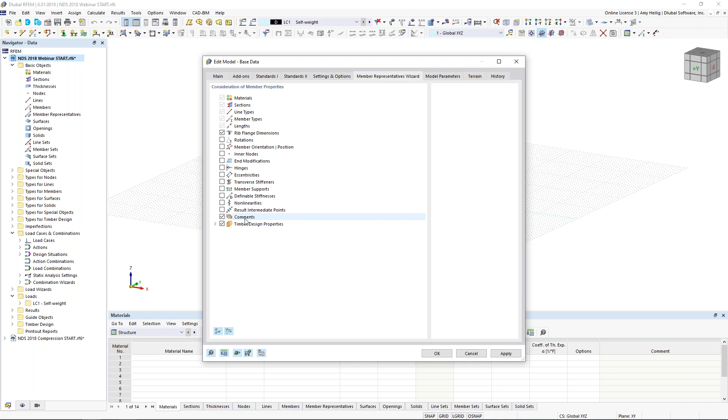Under these settings and options, we will set our global z-axis to upward as well as our local z-axes. I have also enabled these member representatives. So when I activate this option, I get a new tab here. This allows me to group together members that are similar with cross sections, with lengths, with materials. Notice I've also enabled comments—this will come into play later on, so we'll see the advantage of what member representatives can do for us.

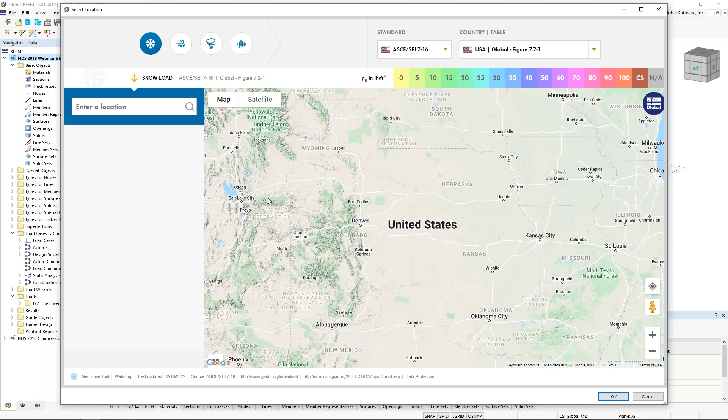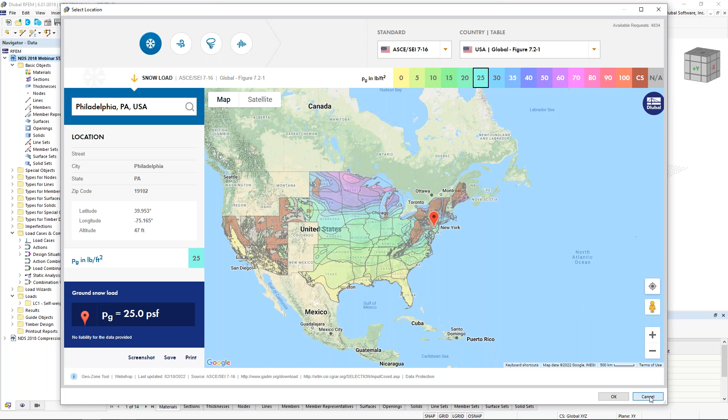Finally, under the model parameters, you can see this links directly to our online GeoZone tool. This GeoZone tool is available on our website where we have integrated the maps from the ASCE 7 for snow, wind, tornado, and seismic. This is linked with Google Maps technology, so we just need to type in our project location, for example Philadelphia, and we can see the ground snow load is automatically populated here directly from the standard. When I click OK, all of this information is automatically imported into the model, to be used for those load wizards a little bit later on.

Once we are done defining the base data, we will be brought into the main program, and we can see our drawing grid activated here. We can modify those drawing grid settings by right-clicking at grid down at the bottom. My default spacing here is set at 1 foot. If we see anything other than this, for example when you first start the model, you might see something like around 3 feet. You can always hit this default option to go back to 1 foot or adjust this to maybe 0.5 feet.

We can also open up our units here and change this to inches if we're working on a much smaller scale.

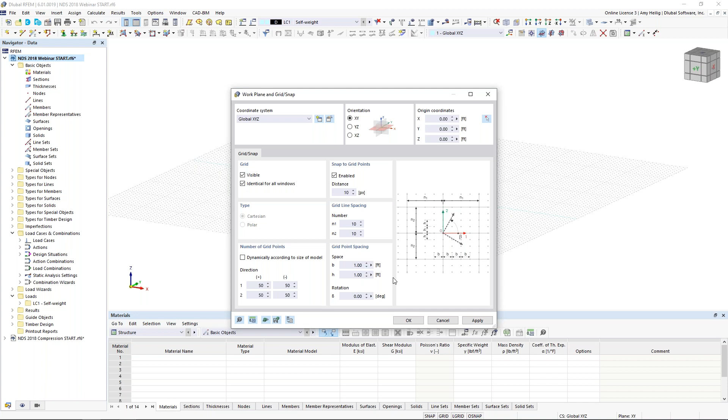There are many different ways to model within the program. We could begin by drawing our first member and defining the cross sections and materials as we go. But an alternative option I'm going to take is to define all of my cross sections and materials at the beginning.

So over in the navigator, I can right click on my sections and create a new section. I want to access my section library, and we have our standardized sections over on the left, which does include timber. When we launch this, we can use our filters to filter to NDS 2018.

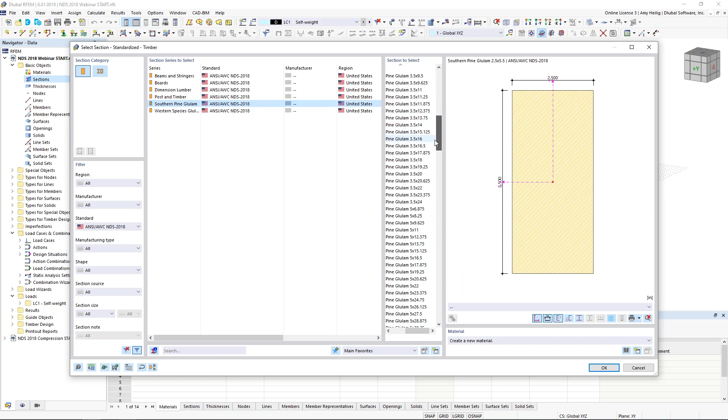We see the various dimensional sections available to us, including glulam, and all of the available sizes. Now the alternative option is to go back into the library and choose one of our parametric massive sections, for example a rectangle. This allows me to input the dimensions directly, and we'll choose 8 inches in width and 15 inches in depth. The cross-section properties will be automatically calculated.

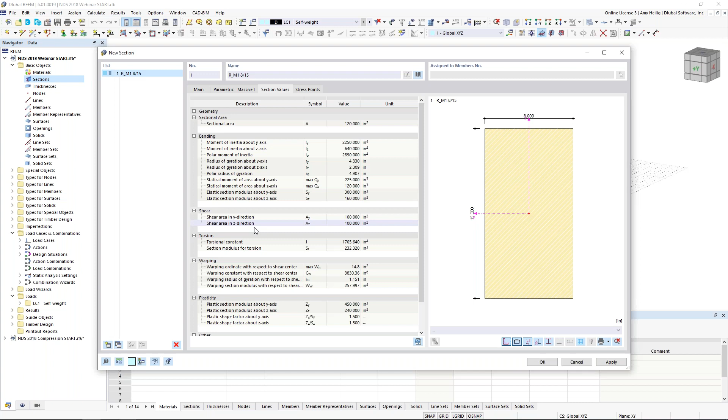Back under that first tab is where we need to set our material for this cross-section. So we'll visit our material database now, and we can use our filters to filter to timber, and filter to NDS 2018, and sure enough we have every single material available here from the NDS standard.

Now we can take it a step further, and perhaps we want to filter to table 5A for our glulam materials. I'm going to select 24F 1.7E. On the right-hand side, we can see the different options, and we'll choose Southern Pine. I click OK, and now that material is available to me for all future sections that I will model in the program.

I can simply make a copy of this existing cross-section, and rather than going into my library, I can just type in the exact dimension here, 26. We'll notice that this cross-section updates accordingly, and the same material will be used.

We want to create one more cross-section here. This time, instead of a rectangle, we'll choose a parametric square section. Under the massive tab, I will go ahead and adjust the dimensions to 6 inches.

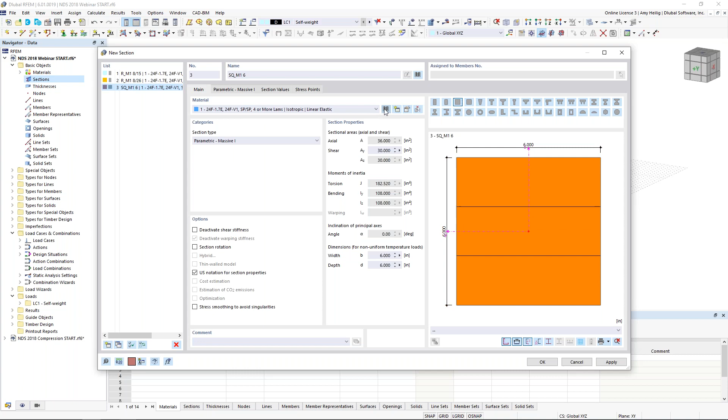Under the main tab, I don't want to set glulam, but rather I'm going to go back into my material library and choose table 4D. Now we can see all of the available materials to us, which is still a little overwhelming, so we can take advantage of the search options down at the bottom.

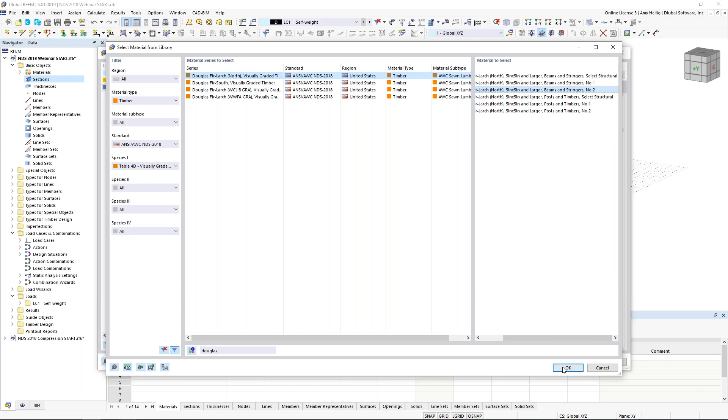If I begin to type Douglas, notice that all of the materials with Douglas within the name are now filtered. So I can choose Douglas Fir-Larch North, and then scroll over to select number 2. I click OK, so now we have that solid section given to us here.

Once I click OK, what I'll notice is that my materials and cross sections are now available within my navigator here. So I want to begin by drawing my first member.

I will adjust my drawing grid into the vertical XZ plane, and go up to my tool to draw a new single member. The member type is going to be beam.

The design properties are activated here, and this is specific to the timber design add-on and relative to these additional tabs up at the top. We'll leave this enabled, but I'm not going to get into the details right now specific for the design properties. We'll go to the section tab here, and the distribution type is going to be set to linear.

This allows me to define a tapered glulam section. Now, new within RFEM 6 is that previously we only allowed you to define a tapered section that looked exactly like this, where the center line just runs right down the center.

But we have added within RFEM 6 the ability to adjust the alignment. So now we can see that the taper only occurs at the bottom section of the member.

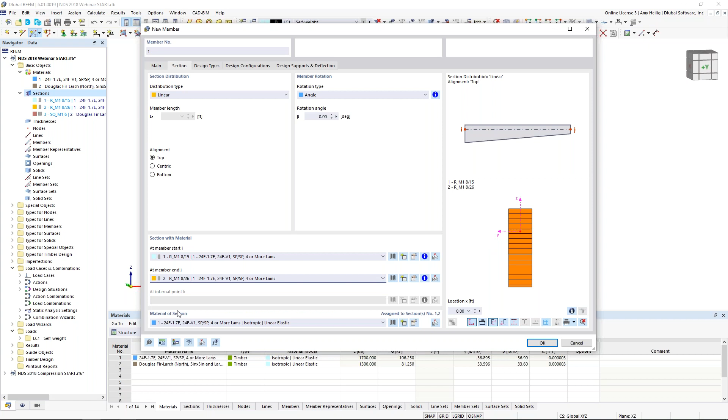So the member start will be that 8 by 15 section, but the member end will be the 8 by 26 that we've already defined. The material is automatically set here. So this is all that we need to do to define our first member. We click OK, and I can snap from the point 0, 0, 0 up to a point 15 feet in the vertical direction, and we have our first tapered member.

Now, in a similar fashion, I can snap to a point here 23 feet in the X direction up to the top of the column. If I right-click to exit out of that dialog box, I see here that I would like to add in some type of pitch for my roof, and I'd like this pitch to be 14 degrees.

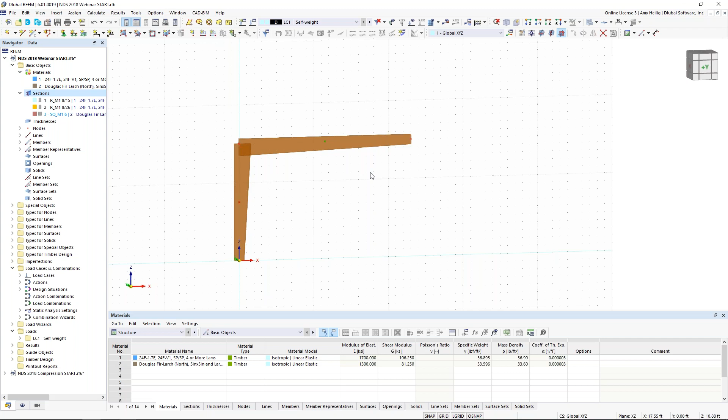So rather than manually having to figure out the geometry, we can select this member, and under the edit options, I can go down to chamfer, and I can input in an angle of -14 degrees. I would like to rotate about the global y-axis in the vertical z direction. And then I need to graphically select my base point here. I click OK, and so now we'll have that 14-degree incline.

I select both of these members, and I'm going to utilize my mirror tool. This is exactly like what we would see in something like AutoCAD, where I can create a copy. I would like to mirror about the ZY plane, and I'm going to choose my mirroring point right here at the apex. I click OK, and we should see our first frame generated.

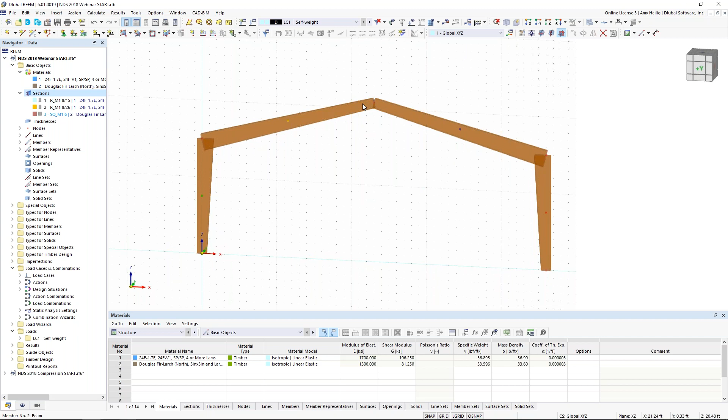Now, I want to add a member hinge at the top here only for my beam on the left. Well, I can do so by double clicking on the member. Now, by default, everything is considered fully fixed. So in order to add in that member hinge, I can activate the hinges here. And now we get a new tab. And at the member start, I can define my member hinge. And you can see that the program automatically suggests I probably want to release the moment about the local Y and local Z axes. That's correct.

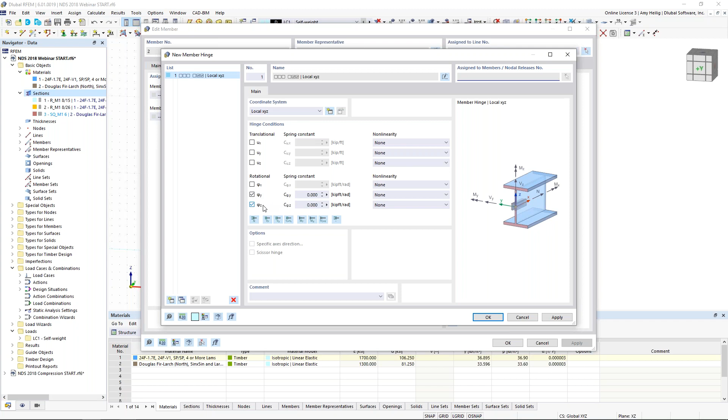I click OK. So now that member hinge definition is available to me for any future members within this model. I don't need to keep redefining. I can simply select it from this drop-down box. I can click OK. And now we should see that member hinge applied to that beam on the left. So I'll turn this into wireframe view, and I'm going to turn off my member representatives in order to make this a little bit more clear for you.

I'm going to hold down my control key to select both of these top members. And I'm going to right click, and under members, I am going to divide the member by a set number of intermediate nodes. So I want to add 2 nodes along the member length here, but it's really important that I also check this option down at the bottom to create the on member nodes without actually dividing the member. We want to keep these as one continuous segment and just rather have these nodes added along the length.

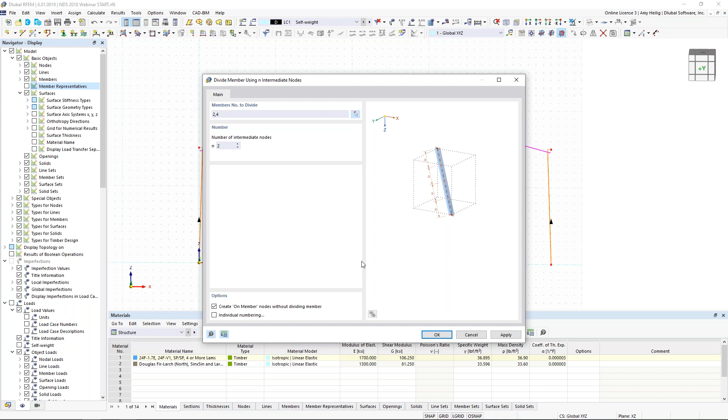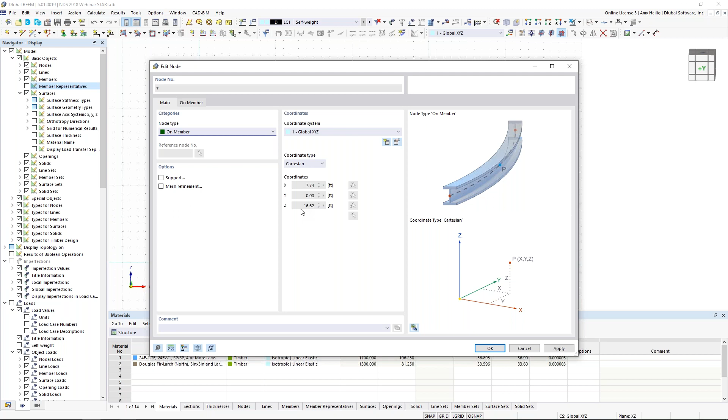So when I click OK, you'll notice that these nodes are added. They're a different color than my standard nodes. If I double click on it, the reason why is because it has this special setting here. The node type is set to on member rather than standard. So now any other member that frames into this original member, or loads we add at these specific nodal points, will all be detected along the member length.

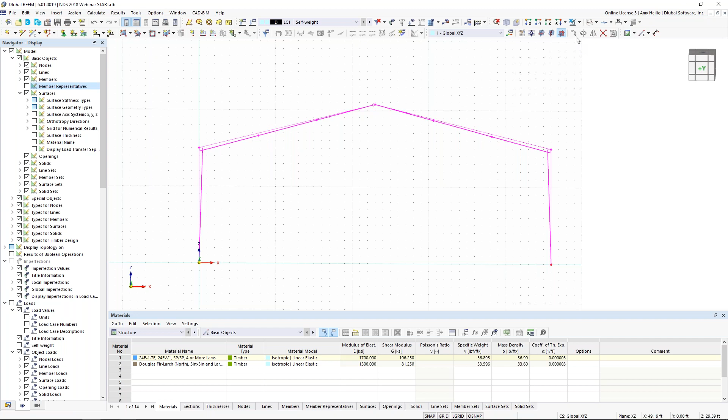I'm going to take my selection box and drag from right to left. And notice I am not going to select the nodes at the bottom of the structure, and there is a reason for this. We will select all of these objects except for those nodes and utilize our Move Copy tool. Move Copy tool allows me to create a copy, and I'll create 4 copies in the Y direction of 16 feet. But under my second tab, I have this option to activate these step links.

So when I activate this, I get a new tab, and the program allows me to create new members between my copied nodes. So I can create a new template, and this should look like a familiar dialog box. It's as though we're drawing a new member. The member type is going to be set to truss.

So truss is a little different, and you'll notice that the hinges is now grayed out. That's because internally we're going to assume that we have a moment release at the member start and the member end. So rather than having to manually define that, we can select truss, and that's automatically applied.

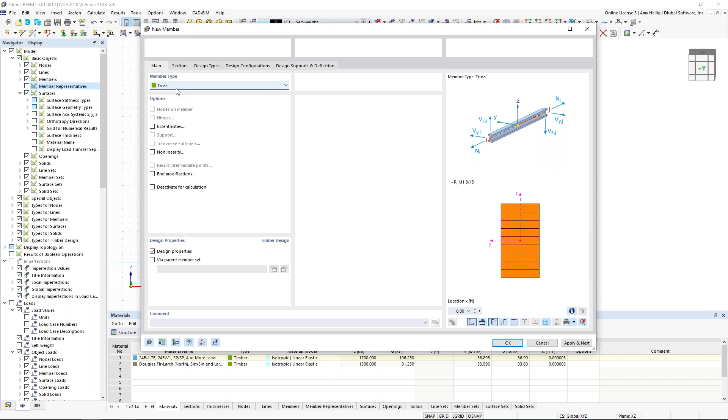Now for my cross section, I want to use my drop-down box here to select that 6x6 solid Douglas fir-larch section. I click OK. Remember, I'm still within the Move Copy dialog box. I click OK. And again, the advantage is that the program has automatically generated those members between those copied nodes.

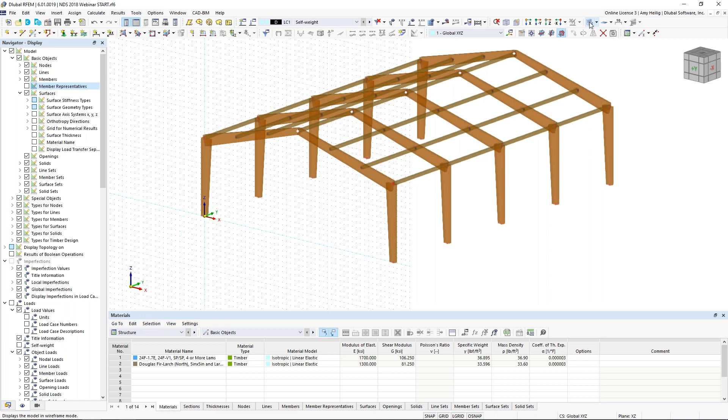Okay, so what we would like to do now is to add some columns at the front and rear of our structure. What I'll do is turn this back to wireframe view, and I'm going to adjust my drawing grid origin with this button up here in my toolbar. And I want to snap that directly to this point along my member length. So we can see when we rotate this around, the drawing grid's still at the front of the structure, but I've just modified the location.

We're going to draw a new member. The member type is beam. I do want to activate the hinges here. At the section tab, I will leave this as the 8x15 section, but not tapered, just one continuous section throughout the length. For the hinges, I would like the member hinge to be applied to the member end. Remember, I've already defined that member hinge. I can select it from my drop-down box.

I click OK, and I'm just going to snap here from a point at the bottom of my structure up to the top, the intersecting node. Now, this node needs to be slightly adjusted at the bottom. Rather than sitting at negative 0.33, I want it to sit at 0 elevation. I just adjust that, I hit enter, and now that column is exactly where it should be. I can highlight this element, hold down my control key, and utilize the drag and drop feature to make a copy here on the right side of the structure.

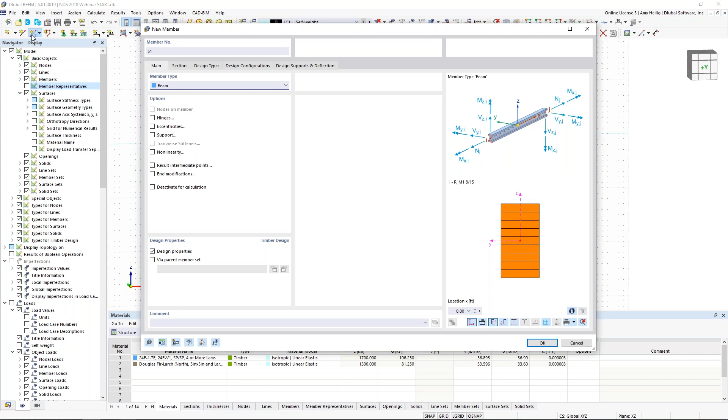I would like to add in some additional lateral bracing here in the global X direction. So we go to draw a new member. Once again, the member type will be set to truss. The section is going to be that 6x6 solid section here. Remember, I don't need to apply any hinges because internally the truss option is taking care of that. And I'm just going to snap from the bottom of my column elements up here to the top. I can rotate this around. Notice the program automatically snaps to these nodal points.

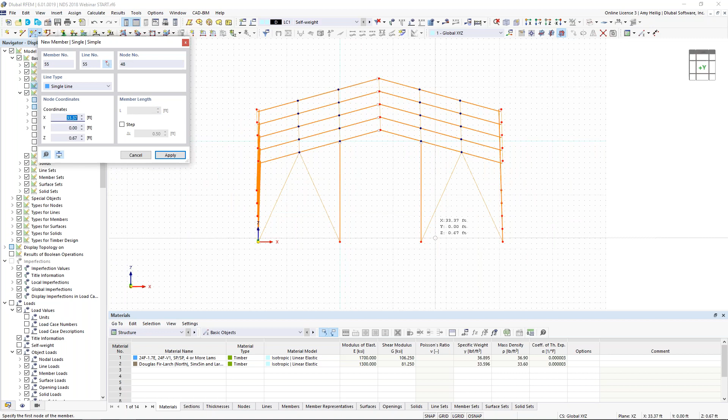While I'm still within this dialog box, I want to add in additional lateral bracing here in the global Y direction. So I will snap from the bottom of the column. Notice the program detects the midpoint here of that truss segment. And I'll do so up here on the roof by just selecting my start and end node points. And we'll do it one more time here. I right click to exit out of this dialog box, zoom in just to make sure everything's connected, everything looks fine. Now I'm going to hold down my control key to select these additional brace elements that I just created.

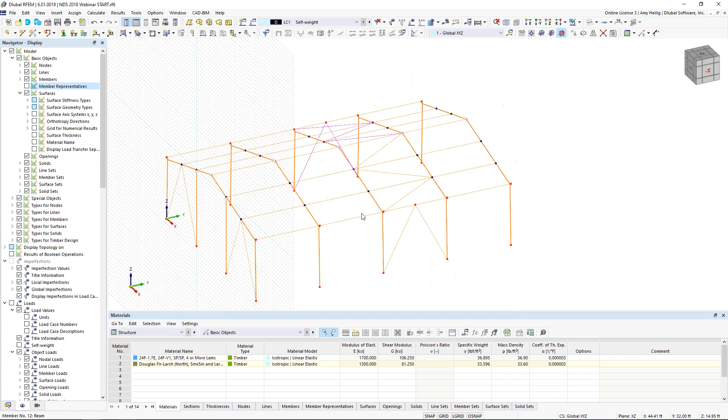We'll utilize our mirror tool once again to create a copy about the YZ plane, and I'm going to select my mirroring point at the top here of my structure. I click OK, and now we have the bracing on the other side. I would like to take these elements at the front of the structure. I will use my selection box to highlight them all. I hold down my control key, I drag and drop to make a copy at the rear of the structure. So now those column elements and braces are shown at the rear of the structure with that simple tool.

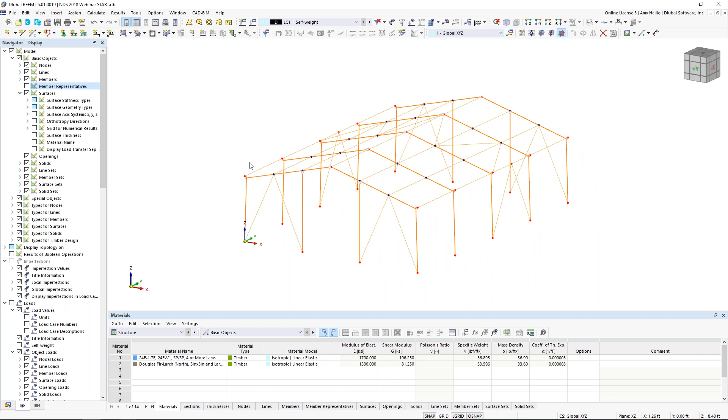Okay, the member modeling is now complete. What I would like to do is to support the structure with a new nodal support, and we can find that up here in our toolbar, assign new nodal support. Now we have some default options here within the dropdown, including a typical hinged, we have fixed, or we have a few roller options. Of course, you can always create your own nodal support option with the 6 degrees of freedom. Non-linearities are available in there as well, but for today, we're just going to choose the default hinged. I click OK, and this will allow me to highlight over all the nodes at the bottom of my structure.

And if I right click to exit out of that dialog box and right click on any one of these nodal supports, I can use my slider option here to increase or decrease the size. So that's also new within RFEM 6. So our member modeling is complete.

We've added the supports. I'd like to move on to loading now, but there's one thing that I want to take care of related to modeling that does affect our loading. So this will be a structure with obviously some type of roof membrane. But I don't want to actually draw in the roof surface with a material and thickness. Rather, I'm going to take advantage of a new feature within the program for load transfer only.

So I'm going to draw a new surface, and the surface is not going to affect the stiffness. It does not add any rigidity to the structure. We're not applying a material. We're purely using it for load transfer to our members. So within our toolbar, we can draw a new surface, and I'll choose the option polygon.

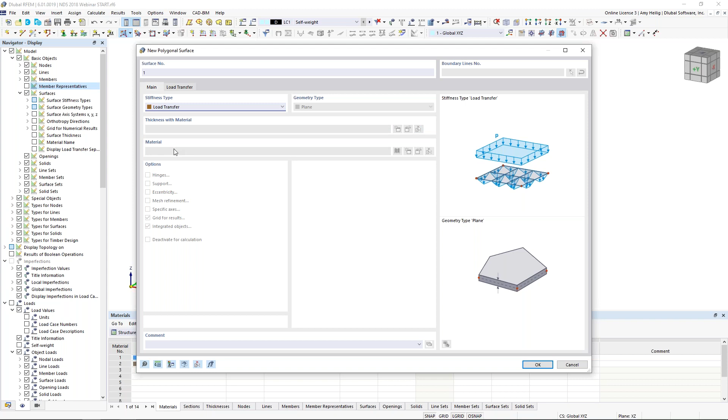So again, rather than the stiffness type set to standard where I would define a material and thickness, we're going to use our dropdown to select this new option, load transfer. Everything is grayed out here. Again, we're not adding stiffness, but rather we go to this second tab here and we tell the program in which direction we want to transfer the load: one-way load distribution in the x-axis, these are local x-axes of the surfaces, local y-axes, or do I want two-way load distribution in both directions? We'll go ahead and stick with only the x direction.

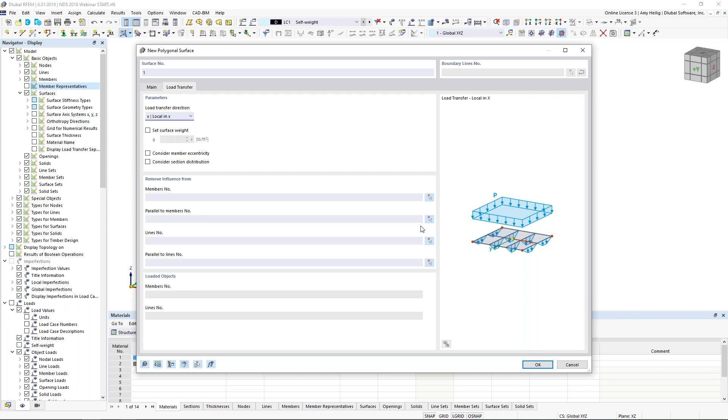And when I click OK, this allows me to snap to my different points here to draw in this load transfer surface on the left side. And we can see that dotted line shown there in wireframe view. We'll do so on the right-hand side, and we'll go ahead and close this loop by selecting our original point, and here are those two surfaces generated.

I can right-click to show the local axis system of those surfaces, and we can just make sure that the local x-axis direction for the load distribution is in the correct orientation. I'll turn back off the local axes. We can even turn this into rendered view here if we'd like to see those surfaces in a bit more detail. So now that these surfaces are drawn, our modeling is complete and we can truly move on to the loading.

So in order to apply the loading to the structure, we need to set up our load cases. I will go up here to my toolbar to select Edit Active Load Case. Now the program by default creates my first load case here, and it is called self-weight. Well, I can go ahead and rename this if I would like to dead load. Notice the self-weight is active here. The action category is based on the ASCE 7. We have selected dead load from this dropdown.

I'm going to create a second load case. This will be called snow load with the action category of snow. Self-weight is unchecked here. We don't want to account for it twice. I'm going to create a third load case, which will be wind 1 with the action category of wind load. And I can even make a copy of this existing wind load case to just simply rename it to wind load 2. Now I'll get back into this dialog box to explain a little bit further about design situations and load combinations, but for now I just wanted to set up these load cases.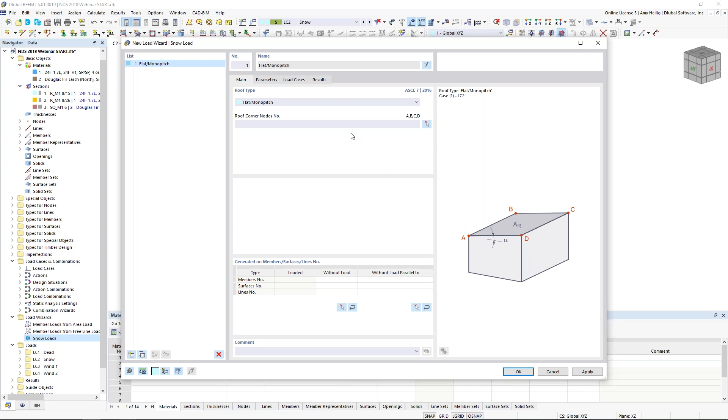So going back to my navigator here, but this time under my data tab, I'm going to scroll down and I'll see my load wizards tree. And we have available the snow loads. So I can double click on this. And what this will allow me to do is to automatically generate the snow loads according to the ASCE 7. So we want to choose the roof type for a duopitch type of structure.

Now, I just want to let you know that this load generator is only applicable for rectangular type structures. If you have anything outside of this geometry, you won't be able to use this automatic load wizard. So just keep that in mind. For today, we do fit into this geometry, so we want to graphically select here the nodes that make up the roof. So we will select the 6 exterior nodes, and I just click one by one. Once I finish that, the program automatically detects what the roof geometry is.

Under the parameters tab, the program has already input my ground snow load. We have connected that to the GeoZone tool directly from our website. It inputs the 25 PSF ground snow load directly from the ASCE 7 maps. Now, of course, you can manually enter in this information as well. Now, the snow load parameters, maybe you'd want to adjust these, such as the terrain category, roof exposure, risk category. We can use our drop-down box for any one of these options.

Under the load cases, we have the ability here to create both the balanced and unbalanced load cases. Now, I'm not going to create the unbalanced for today, so I'll just go ahead and uncheck them, but we will create the simple load case for balance. The program recognizes, okay, we probably want to use load case 2 here that was already set to the snow load designation. So it's populated that.

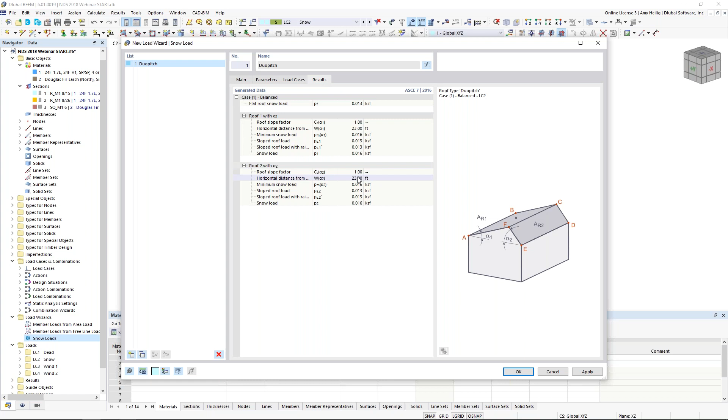Under the results tab, this is just the calculation to essentially come up with the applied area load for our snow load. So once I click OK, what we can see is that snow load applied to the structure here based on the ASCE 7. If I right click to display separately, and then I take my second step here of activating again to display the load transfer separately, we can now see those loads applied to our mainframe elements here for the automated loads.

Okay, moving on to wind loads. Again, this is still in development for our automatic wind load generation according to the ASCE 7, so we'll just be applying those manually for today. Now, I'm assuming that I have an open structure here, so wind is free to move throughout the bottom of the structure. So perhaps for my simple wind load cases, I want to have one wind load with uplift and one wind load with downward pressure.

Well, for load case 3 here, we will begin with a new surface load. The difference here is that I want to change this based on the local X, Y, and Z coordinates of the surface itself. So we'll leave this according to the local Z direction. I want to modify the magnitude to 0.025 kips per square feet. I select graphically surface number 1. I click OK, and then notice I'm going to hit apply and next.

What this allows me to do is to remain within this dialog box, but we can see the upward wind load applied in the background here to surface number 1. Well, now I can just simply adjust the magnitude to 0.015 kips per square feet. I can graphically select surface number 2. I hit apply and next, and now we see that additional surface load applied on the second surface. Well, now I can simply switch to load case number 4, while again, still within this dialog box.

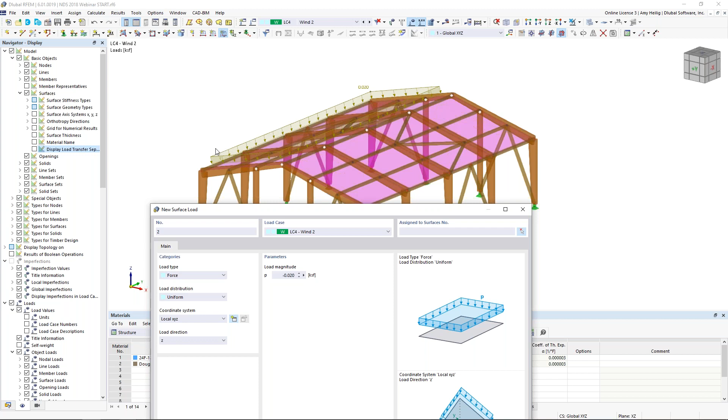I adjust my magnitude to negative 0.02 kips per square feet. I can type in surface number 1. I don't necessarily have to graphically select it. I hit apply and next, and we see that downward pressure applied to surface number 1 under load case 4. I'm going to adjust my magnitude for the last time here to negative 0.01 kips per square feet.

I apply to surface number 2, and I click OK. So now all of our loads have been applied to the structure. So let us go back into the load cases and combinations dialog box here.

Back under the base tab, remember we have activated the load combinations to automatically be generated according to the ASCE 7. The program does require us to choose the wood option because we have activated the timber design add-on. And the entire reason for this is the feature of creep. So let us jump back to the PowerPoint to discuss this in a bit more detail.

So when we automatically generate these load combinations according to the ASCE 7, in particular wood, we are going to create a third design situation. And design situations will make a little bit more sense in just a minute, but I want this to be clear that we are actually going to reference the IBC 2018, and in particular section 1604.3, in order to generate the serviceability load combinations directly from the IBC for our serviceability checks when we go ahead and run the timber design.

And within these load combinations designated within this design situation, one of them will include this creep factor multiplied by our dead load, in order to consider creep. So a new feature here is previously we were not able to consider this creep factor. So you'll notice within the drop-down box, if we do not want to consider creep at all, we can just set this to 1.0. But otherwise, we would choose the 1.5 or 2 factors here. This comes directly from the NDS standard.

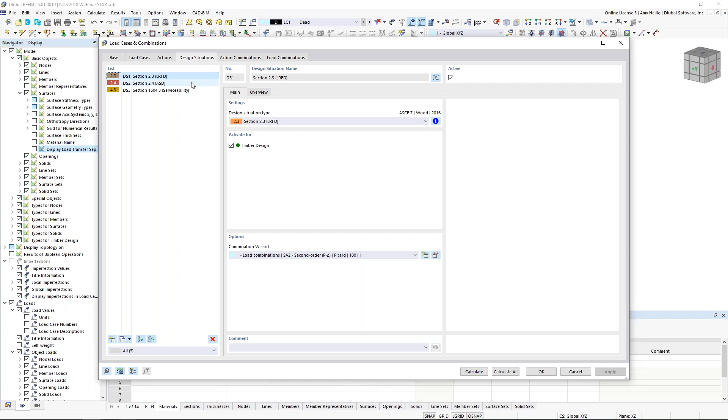I always like to activate this option here, combination names according to the action category. And we will jump to the design situations. So we have 3 design situations generated, 2 directly from the ASCE 7, LRFD, which is our factored load combinations, ASD, which is our unfactored load combinations. And again, this is new within the ASCE 7 wood, is we are going to create this 3rd design situation here for serviceability.

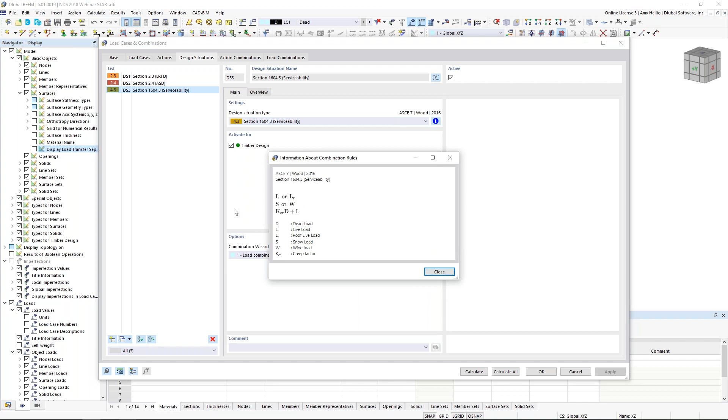If we want to click this info button, we can see directly the load cases that will be considered for the generation of the load combinations. And here is that creep factor times our dead load. All of these are active for our timber design add-on.

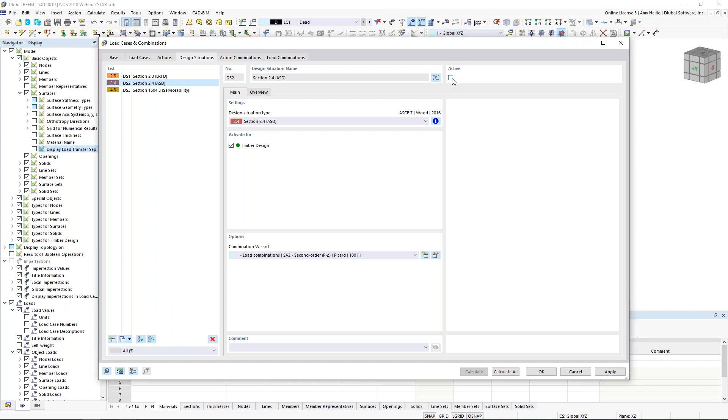Now for today, I am going to be doing my design according to LRFD, not ASD. Therefore, I don't need the ASD load combination, so I can just simply deactivate that here. It will just decrease the number of load combinations, which we can see here under our last tab. Here are my factored LRFD load combinations for my first design situation, and my 3rd design situation are my IBC load combinations. And here we see the 1.5, and we can toggle here to the assignment, the 1.5 creep factor multiplied by our dead load.

Okay, so now that these load combinations are set up, what we can do within our drop-down box is see all of the available load combinations we were just looking at. We can view all of the loads applied to the structure, including the relevant load factors according to the ASCE 7 and the IBC. So technically, we are ready to run the analysis portion. But again, the huge advantage of running RFEM 6 is that these add-ons have all been integrated here within the main program. So we want to do the analysis and design workflow together.

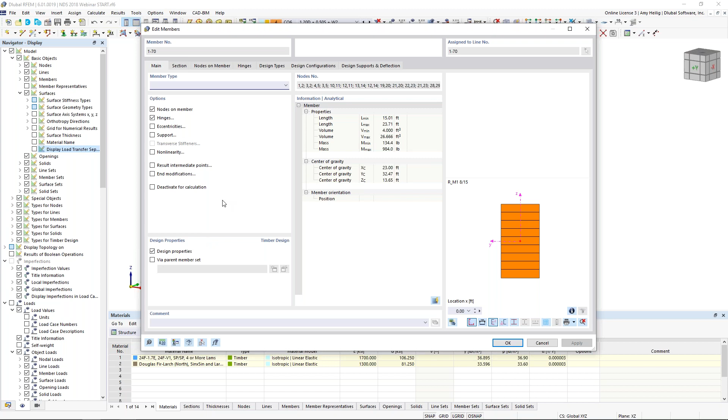So what I'm going to do is to move into the design properties for all of these members. And if I highlight all of my members and I take a look at the edit member detail settings here within my dialog box, you can see I have members 1 through 70 selected. And we have our design properties turned on here, which activates these various settings for design types, design configurations, and so on. Now, rather than individually setting this information, I want to take advantage now of our member representatives. So I will go back into my navigator display settings. I'll turn off my surfaces here.

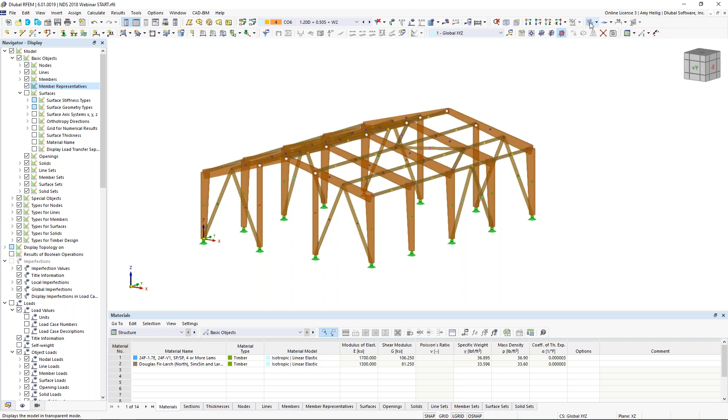Let me turn on the member representatives and wireframe view. You'll notice we have a lot of color coding going on here. We've activated that within the base data, so the program has grouped together similar members with cross sections, materials, and so on. Now I want to take these 4 members at the end, holding down my control key to select them.

I'm going to double click to edit, and add a comment down here, such as end frame. Remember, I also activated the option at the beginning of the presentation so that member representatives will detect different comments. So now these 4 members are in a different member representative group than the interior members. Back under my navigator display, I can also see the color coding, and we can scroll through the different member design or member representative options here.

So what is the advantage of these? When I double click any one of these colored dots, for example member representative number 4, it will bring me into the member representative dialog box, and you'll notice we have these exact same tabs that we saw for each individual member. So what I can do now is input the design information for a group of members that I know are all going to have the same unbraced lengths, the same service conditions, whatever it may be. That way I can go into the member representatives, make a change, and it will affect all of those group members rather than individually applying to each member.

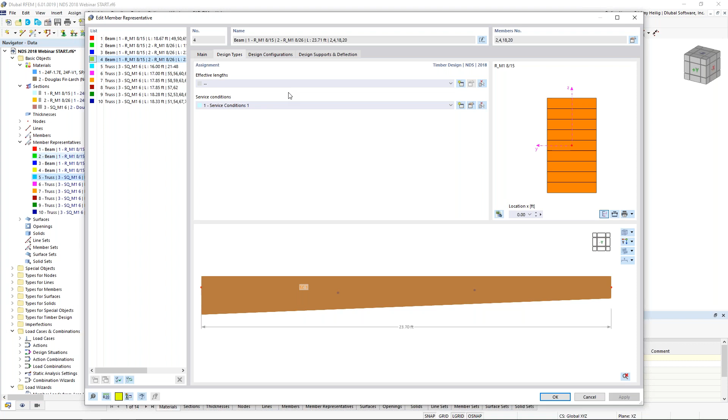So let us begin here with this initial tapered members. Remember, this includes the 4 exterior girders here. Now we want to start off with the effective length, so I'll create a new effective length here. This is my input information for stability design, so we're talking about flexural buckling about the strong axis, the weak axis, and lateral torsional buckling.

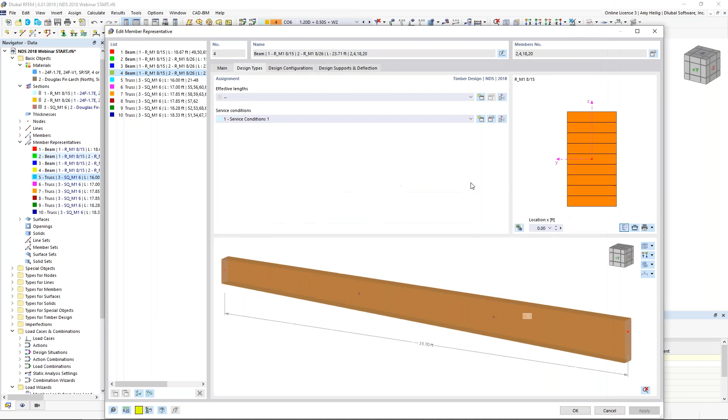Now we want to set the information here on the second tab, but before I do, when I initially create a new effective length, notice over on the right-hand side, my members aren't populated. Well, if I initially create this definition, click OK, and go back into edit the same effective lengths, notice now the program says we're going to assign this to members 2, 4, 18, and 20. Why do I want to do that? Because now my picture in the lower right-hand corner will populate, so I can see exactly which members I'm looking at in order to apply my intermediate restraints.

So let me turn this to wireframe view. Now this all has to do with K-factors, with unbraced lengths, incredibly important for design. And we have two options here. Number one, we could work with the table down here at the bottom. Perhaps we want to toggle this to absolute values, and I could just directly input K times L for my strong axis buckling, weak axis buckling, lateral torsional buckling.

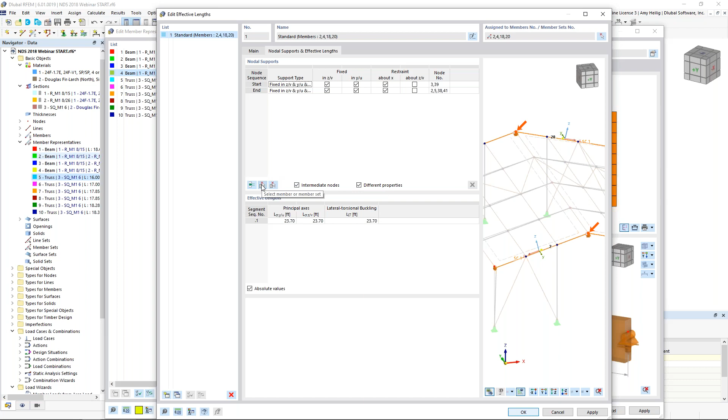Now, alternatively, I can take advantage of inputting these intermediate supports graphically so that the program can calculate the K times L or the effective lengths automatically for me. What I want to do is have the program detect the intermediate nodes along the member length. So I'm going to activate this option here, intermediate nodes, and then use this option to select the member. I can select any one of these 4 members here, I'll just choose any one of them. And now notice the program has detected these 4 nodes along the member length.

So we'll begin right here at the apex. Notice we only have a truss member framing in the weak axis direction, so I probably want to add this intermediate restraint here to only restrain my tapered element in the weak axis or local Y direction. For node number 2, we have a column framing up, so I'm going to assume that this element is restrained in the vertical Z direction, as well as in the weak axis direction from my truss, as well as rotation against torsion at this location.

For my third node here, I'm going to assume these braces really have not much impact, so I'm only going to restrain the member in the weak axis direction. And finally, for my fourth node, we're going to leave this as default in the local Z, local Y, and about the local X axes. So now these 3 segments are updated here to consider my true unbraced length.

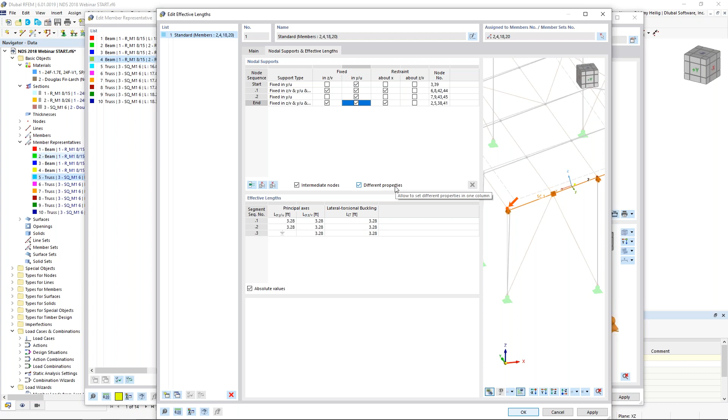So this is how we can automatically consider that within the program by setting these intermediate restraints. When I click OK, we can see here in wireframe view these intermediate restraints applied internally within the member. They're not true supports like nodal supports that we initially applied at the bottoms of our columns. They're just purely used for the design.

Now we want to jump to our member representatives here, which include my 6 interior frame elements. We have a little bit of a different scenario here, so I'm going to create a new effective length. Once again, I'm going to define this effective length, click OK, and go right back in there to edit it.

The reason why is because now under the second tab, I can toggle to my picture and I see my 6 members updated here within my graphical view. I want to detect those intermediate nodes, so I'll graphically select any one of those 6 elements. I see my 4 nodes detected here.

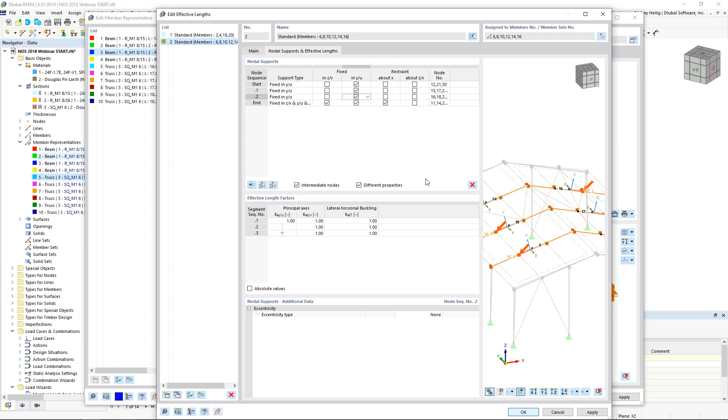Up at the apex, I want to restrain it in the weak axis direction only. At my second node, it is also the weak axis direction only. My third node, weak axis direction only. We have no columns framing up at the center beams here. But finally, at my fourth node, we do have a column. I'm going to assume that the program is going to restrain this in the vertical Z direction, the local Y direction, and about torsion. So we can toggle to our absolute values to see everything updated accordingly.

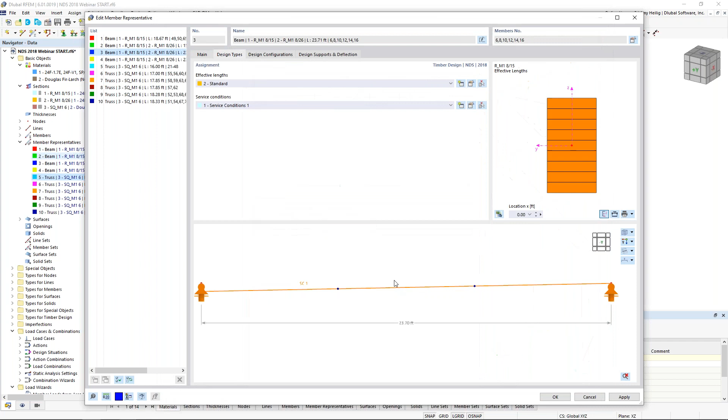Okay, so now that we have defined these for those 6 interior members, we can see the program update here automatically to show what's going to be used for design.

So let us talk about the remainder of all of these member representatives. I'm holding down my control key to select all of them. It is all the remaining braces, the columns, and for this we need to define a third effective length, and this one is much easier. All that we need to do here is leave this as default. These members are supported at the member start and the member end according to these default options here. No intermediate nodes detected. I click OK. We can see the program update graphically here within our view.

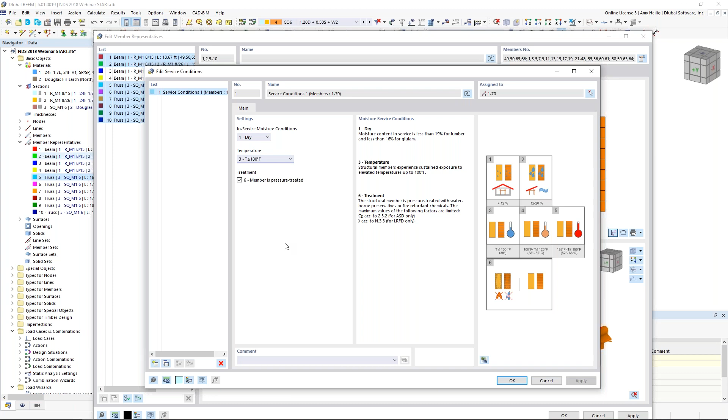Now for the rest of these settings, the service conditions - if we go into the detail settings for these, are the members wet? Are they dry? What is the temperature? Is it pressure treated? We know that this is all going to affect the adjustment factors for the NDS design.

The local section reductions - we can create notches in our members. So perhaps we have a notch at the member start or the member end, or internally, we can define that here with these section reductions. Now this is only available for standard members. You wouldn't see this option for our tapered members if we went back to one of these other member representatives.

The design configuration - so we have here strength, design, serviceability, and fire. Let us begin with the strength configuration. We'll go into the settings here. So just some various settings that will go into the strength design according specifically to the NDS.

So for example, torsion - if we're not really wanting to design these members for torsion, the NDS is a little bit vague on torsion design, and I really just want to skip this. Well, what I can do is set a higher ratio here, such as 0.3. So as long as my stresses for torsion are below a 0.3 ratio of the limiting torsion capacity, then we'll completely skip this check. So that's a little trick you can do here within these settings.

Now we have some additional settings, including topics like the size factors, the flat use factors, and so on. Under the Stability tab, this is a new feature within RFEM 6 specific to the NDS. It is the representative dimension for tapered compression members. I'll go back to the PowerPoint to explain this in more detail.

This all depends on the support conditions, but this is how we calculate that representative dimension. We'll use variables like the maximum depth for the tapered section and the minimum depth for the tapered section in order to calculate this. Again, this all depends on your support conditions.

You'll want to refer to the NDS to review these equations in more detail. The equation preference can be set under the timber strength configuration, under the stability tab, which is exactly what we're looking at here. So I'll go back to the model and we can choose either equation. I'll stick with equation 3.7-3. Once we run our results, I'll show you what this looks like and how we can consider this according to the NDS provisions.

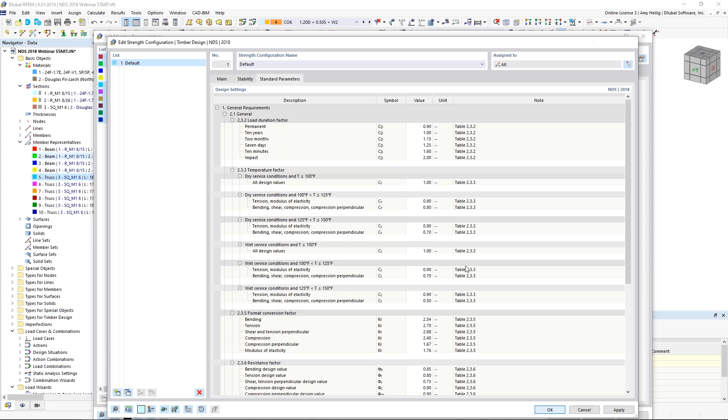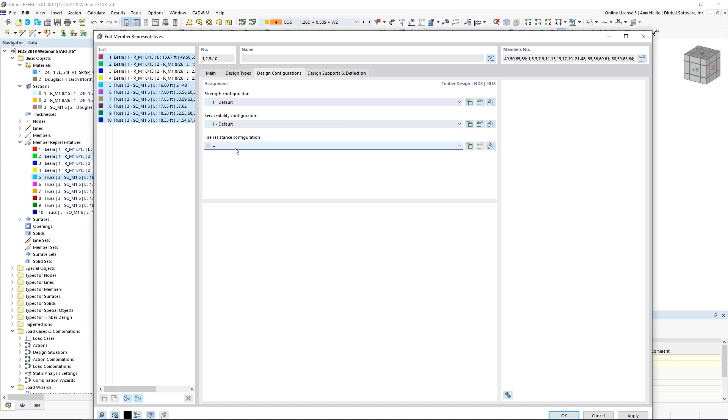Once we've reviewed the strength configurations, we want to take a look at our serviceability configurations, which is quite a bit simpler. We have our limiting deflection ratios for simply supported L/360 and cantilevers at L/180, and you can adjust those as you see fit. Fire resistance design, we won't be doing that today, but that is a possibility to also calculate according to the NDS standard. I'll just go ahead and clear out this setting for now, that's fine.

For the design supports and deflection, by default the program automatically considers every member as simply supported, so it refers back to that L/360 design ratio. If you have a cantilever, you will need to define a design support at the member start or member end. I'll breeze through this tab because our second quick example at the end of the presentation will go into much more detail here, so for now we'll keep everything as default.

Once all of these settings have been defined, we're ready to run our analysis and the design of the structure. So we'll utilize our table options down here to drop down to timber design. This is active because, remember, at the very beginning of the presentation I enabled that timber design add-on.

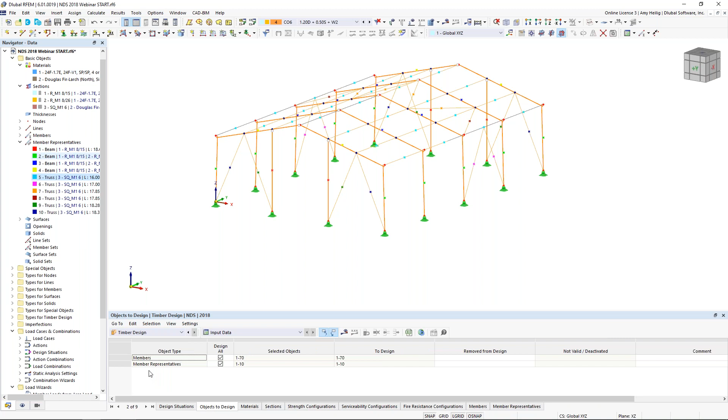If I take a look at my table settings here, in this first tab, design situations, I have my 3 design situations that were generated automatically by the program: LRFD, ASD, and serviceability from the IBC, which we've already reviewed. I'm not doing ASD design today, so I'll simply uncheck that. Notice my factored load combinations, or my LRFD design situations, should be associated here with my strength limit state design, so I'll make sure that's selected appropriately from the drop-down box.

I'm not doing ASD design, so we'll skip over that. Finally, my third design situation for serviceability should be set according to the serviceability limit state design. Now the program knows which load combinations to refer to for the actual design portion of the calculation.

If we wanted to run fire design, we could go back into load cases and combinations, make a copy of our LRFD design situation, and select fire design from the drop-down box. Under the objects to design, we see members 1 through 70 are automatically selected, all of our member representatives already selected here. Everything was defined for our design input for each of those members, so we should be able to design all of them as well.

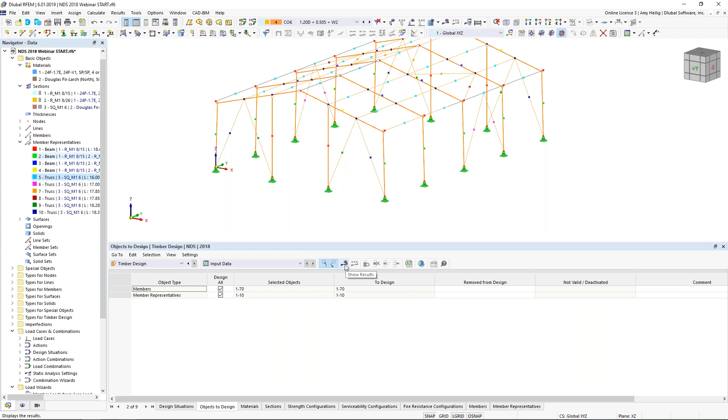I'm now ready to run my calculation, which I can do directly within this table. So I begin the calculation, and the program must run through all of my various load combinations in order to determine the internal forces and the stresses. You can see these solve pretty quickly now in RFEM 6, and we're now running the timber design add-on according to the NDS standard, and here we are presented with our results.

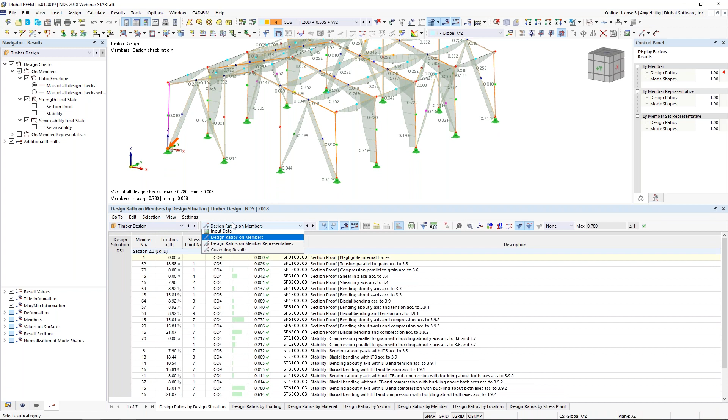I'm still looking within the table format for my timber design here, but now I have available the design ratios such as for the member representatives. Down at the bottom, I can select the design ratios by member representatives here.

And as you can see, the program is synced up with the graphical view so that we're showing you every check within the NDS. For this group of member representatives, the program will point you to exactly where the controlling internal force or stress is located.

If we're interested in filtering to only the max design ratio, we can take advantage of the filter options up here at the top. So perhaps we want to choose the option max, and now maybe we're not so overwhelmed, so that we can just see what's exactly controlling for each member representative.

So going back to the details here within our design, I want to take a look at one of these checks. So we can see the member that we're currently looking at, one of these columns, and stability for compression parallel to the grain. Well, we've added within RFEM 6 the ability to check out the design check details.

And I think this is incredibly powerful because now we are showing you all variables. We are going to show you all of the equations here, and also the code references directly to the NDS standard. All of this comes into play to determine eventually what is our design ratio here at the bottom. So incredibly transparent, we can understand where all of those numbers are coming from. We can add this information to our printout report.

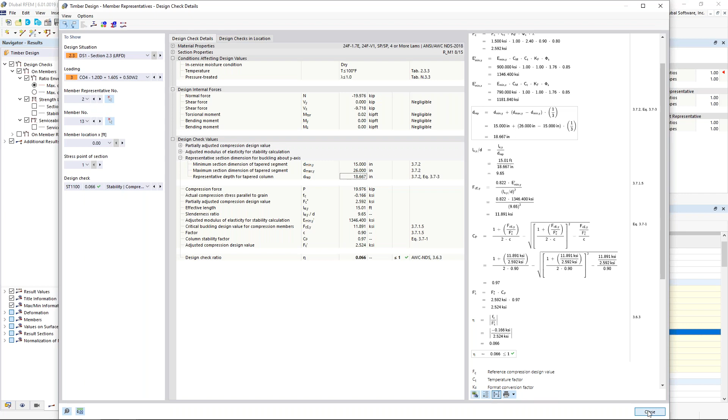Okay, so now that we have reviewed all of the timber design, of course, there's much more to look at, but for the sake of time, we'll just give you a brief overview for today. Now, I want to back this up a step. So let's take a look at only one of our frame elements here, and maybe we choose the visibility by the selected object. So we don't necessarily have to view the entire structure at once.

I'm still looking at my timber design. And to briefly mention as well, everything's available to me graphically. If we go back into our navigator, we can see within our dropdown, we are viewing the timber design results. So perhaps we want to turn off the max design ratio and only turn on the serviceability for this particular frame. Or maybe we want to turn that off and we want to take a look at the stability checks. So we can toggle those on and off. We can add them to our printout report as well.

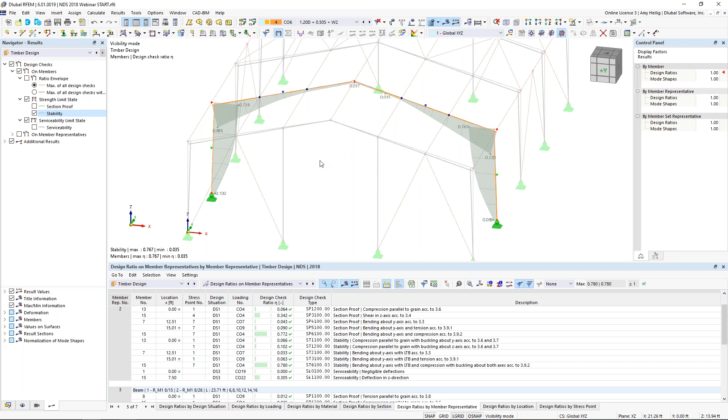But in addition to the timber design, we also have this drop-down box for the static analysis. So the static analysis was required to determine those internal forces, the stresses, deflections, and so on. Notice my table automatically syncs up here to drop me to the static analysis, and my results can be viewed in table format. So for example, I'm currently looking at the deformation, but maybe I'm interested in the internal forces of the members. So I can see my axial forces here, my shear forces, maybe my bending moments.

And for any one of these members, I can right click, and under the members option, I can take a look at my results diagram. The results diagram allows me to turn on and off these various internal forces, deformations. I can view in a bit more detail what's going on along the member length. I can toggle to different load combinations here. I can add this to my printout report. I also can drag this over to my second monitor and continue working concurrently within the program.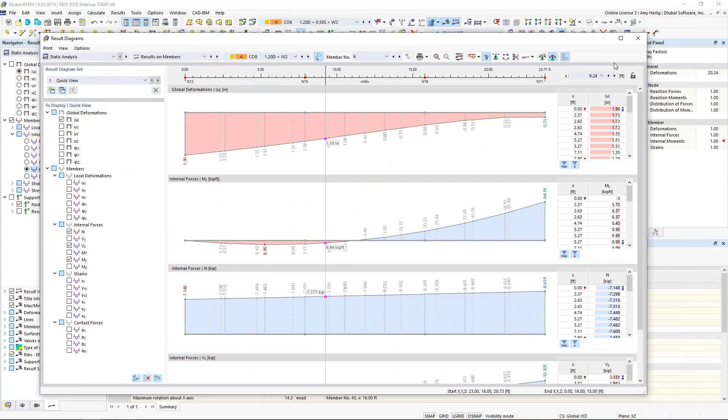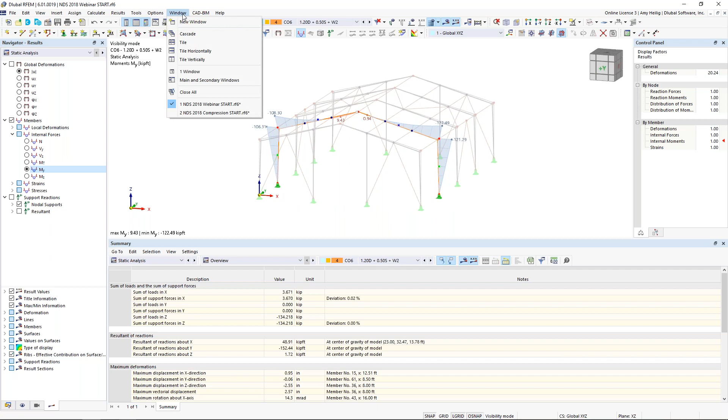So I think it's important to know, again, that both the static analysis and design workflow is working together within RFEM 6, and both of those results are available to us. Okay, so that will summarize essentially timber member design for the most part of this entire structure, but I did want to talk about one more new feature, and I think that this is best described with a new model, just so we can simplify a little bit here.

So I'll open up this already saved model, and we can see that we have multiple members drawn here. And we have our main girder element spanning in the global y-axis direction. Then I have these additional joist members, and these joists are actually going to be supported by the girder member. So they're technically going to be placed at the top of this member.

When we turn this into wireframe view, we know that with any FEA program, these members are just represented by a single center line. Of course, we can render it just to get a better feel of what dimensions are being used, how these members frame in together. But underneath the hood, this is what's going on.

So if my joists are sitting on top of this girder, sure, I could add in an eccentricity to move these joists up to the top, but sometimes this causes unwanted moments at our member end. So for today's example, we're just going to leave this exactly as it's shown, but just visually know that we want these joists to be framing in at the top of this girder supported by it.

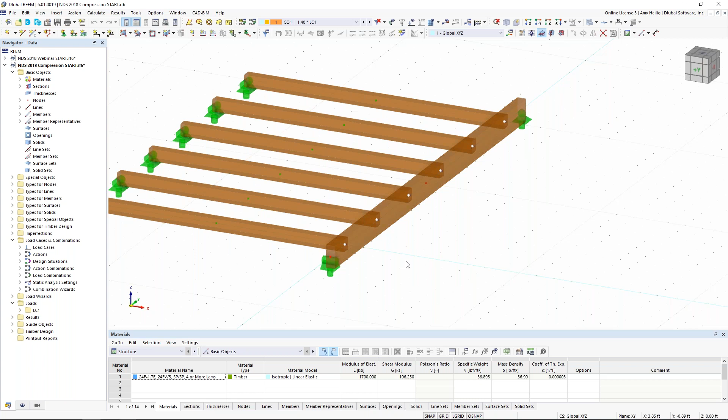So what is the entire purpose of this example? Well, now we want to turn to a topic that again is new within RFEM 6, and it is compression design with stresses perpendicular to the grain. So I'm going to highlight all of my joist elements here, and I can double click. Now, again, we could take advantage of our member representatives in order to set these detail settings. Or for my simple example today, I'll just set each one of them individually, so members 1 through 6.

Now we're going to go back to the design support and deflection tab that I mentioned in the last example I was just quickly going over. So what is the importance of this tab other than just simple deflection? I'll go back to the PowerPoint here so we can talk about compression perpendicular to the grain. And we'll be referring to the NDS 2018 section 3.10.2, bearing perpendicular to the grain.

Now, similarly, in our example today, not only do we have this situation, but we also have the joist sitting on top of the girder with a force acting downward, but it's still a stress perpendicular to the grain. Well, previously in RFEM 5, we did not do this check. And the reason is simple, is that the bearing area was not known.

If you remember back to the wireframe view, all that we know are these simple line elements framing in together within the FEA analysis. But now within RFEM 6, we have the ability to do this check because we have the new feature under the design supports. So you want to refer to the NDS section 4.2.6 because it is important here that we consider the reference design compression values perpendicular to the grain depending on the member's material.

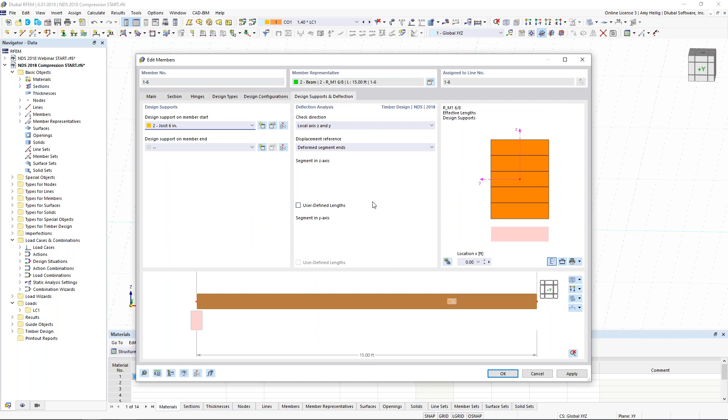I will go ahead and make a copy of this one, and we're going to rename this one to joist 6 inches, and we're going to set the support length to 6 inches. So when I click OK, this allows me to define at my member start that 3-inch support, and we can see this in the background. It will be applicable to these supports over on the left. And then for my support on the right-hand side where it's resting on this girder, we want to select the joist 6 inches. And we can see those supports shown here graphically.

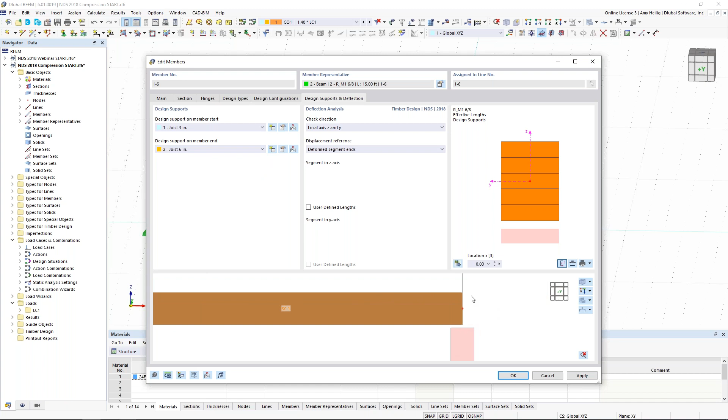Now notice everything is framing in at the center line. If we wanted to, under the main tab, we could activate here the end modifications and we get an additional tab available to us. So what is the advantage here of the end modifications? Well, if we wanted to graphically extend the member to the edge of the support, we could do so with a quick click of a button here. Now, this does not affect the analysis, the stiffness, the design whatsoever. It's purely for graphical representation.

So maybe it's important that you add this to your printout report and you want to show that the member goes all the way to the end of the design support. But just know that internally, we're treating everything with the center lines. Okay, so now that we have defined the supports for our joists, we can click OK, and we should graphically see them now at the bottom of our joists here back within the main program.

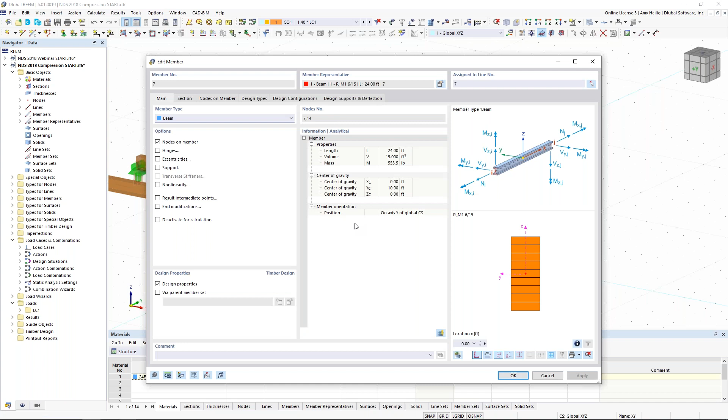Now we want to do the exact same thing for our girder element. I'll jump here to design supports and deflection. I create a new design support definition. This one will be girder 5 inches, with the support length of 5 inches. So this is going to be applied at the member start and the member end.

Now I want to create a copy of this one, and we will call this one girder 6 inches. The difference here, not only the support length set to 6 inches, but we want to set this on the positive Z-axis of the member, as well as activate the inner support. This is where the joists are going to be bearing down at the top side of the member instead.

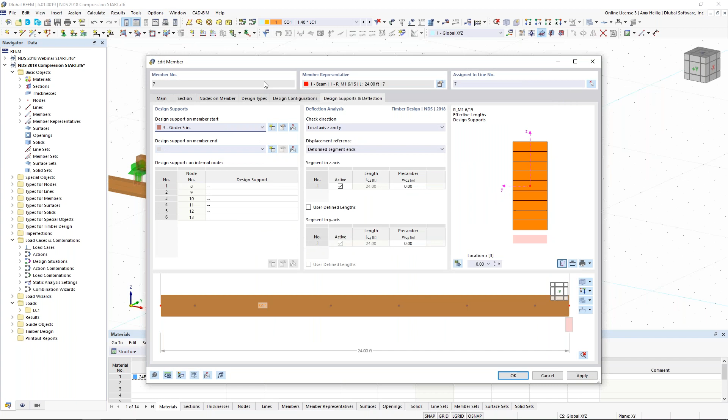So when I click OK, what we can do here is to select the girder 5 inches, and this will be applied at the member start and the member end here where we have those nodal supports. Girder 5 inches, girder 5 inches, and then in my interior nodes, which we can see along the member length here, we want to select that defined girder 6 inches. If I hit my down arrow key and F8 on the keyboard, the program will automatically copy the cell before it for each one of those settings. And now we get a better visual representation here of those joists sitting on top of the girder.

But we have one small problem here. Notice that this tab is also used for deflection checks. And now the program's automatically assuming that my deflection should be checked with my L/360 ratio between each 4-foot segment, and that's incorrect. We want the member to refer to the full member length for the deflection design. So how do we fix this? Well, let's go back into the edit settings here for this last girder 6-inch design support. And what I can do is to simply uncheck this option down at the bottom to consider the support in the deflection design.

Alternatively, if we're thinking, okay, we do want to consider the support for the deflection design, but I don't want to check compression, what we can do is to activate this here and uncheck the direct support instead. So if we don't want to have those compression checks according to the NDS, just go ahead and uncheck the direct support. But in this situation, we just don't want it to be considered for deflection design. Notice our table updates automatically here to the full member length of 24 feet.

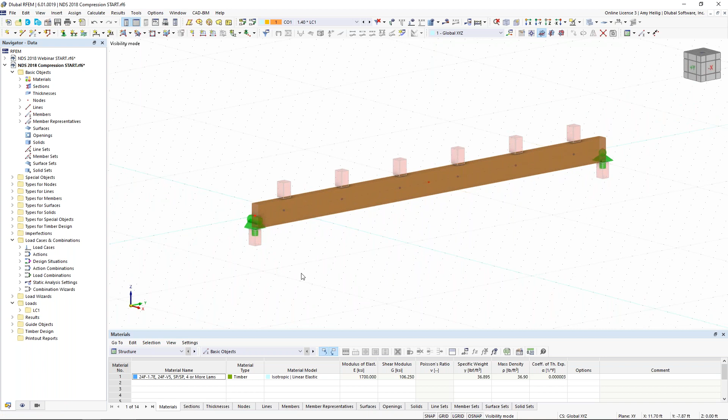I click OK, and now we can see these design supports shown along the girder. Now, if I want, I can select this element and view the visibility by the selected objects, right-click to go ahead and hide the objects in the background. This gives us a better representation visually of those joists sitting along the member, as well as our supports.

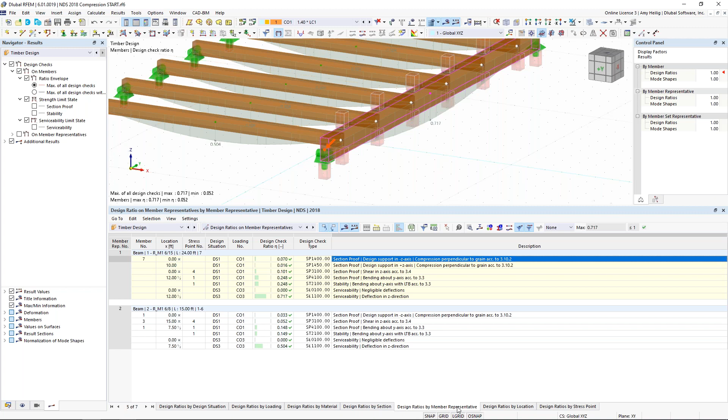Okay, so now that we have defined these design supports, let us quickly run the calculation in the timber design. And I only want to point out what the design calculation details look like for this new check within RFEM 6. So again, I'm looking at my design ratios by member representatives tab down at the bottom. And currently we're looking at the compression perpendicular to the grain according to 3.10.2. So again, this is that new check here.

Well, before we look at the details of this particular check, let's back up a step to go to the static analysis. And this is just going to show me my support reaction for the static analysis at this particular location. And we can see that is 2.35 kips. Well, if I toggle back to my timber design and I take a look at my compression perpendicular to the grain at this location, and I go into my design check details here, sure enough, the compression force perpendicular to the grain that the member must resist is that 2.35 kips for my support reaction.

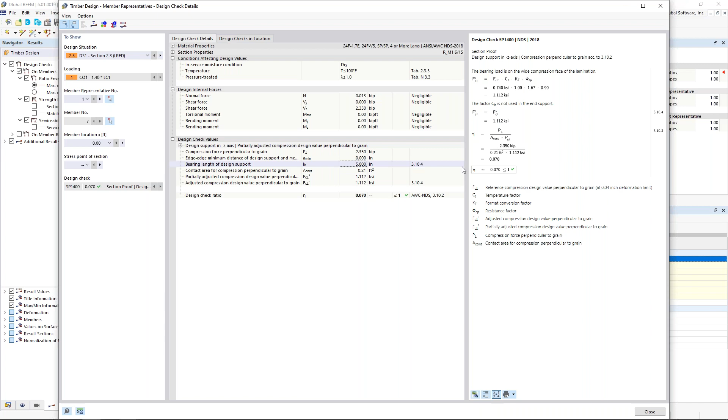We look at the additional details here. We can see the bearing length of the design support is set at 5 inches. If you remember, I had manually input that in with the design support. The program multiplies that by the member width, the 6 inches, ultimately to get the bearing area here of 0.21 square feet. So now we can run this calculation check for the compression perpendicular to the grain to get our design ratio of 0.07. So again, this is new within RFEM 6 and it's only available when you define those design supports.

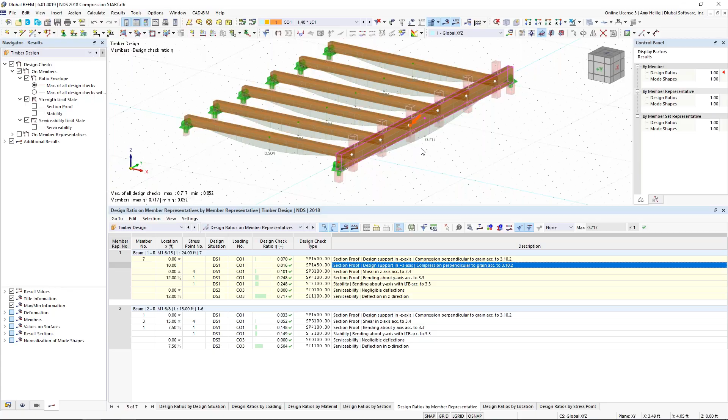If we take a look just a little further down the member here, we're also going to see compression perpendicular to grain, but this time for the positive z-axis. Well, this is those joists framing down at the top of the member. So we'll go ahead and check that similar check here, but rather at the internal point of the member. All right, so that will wrap up our examples today.